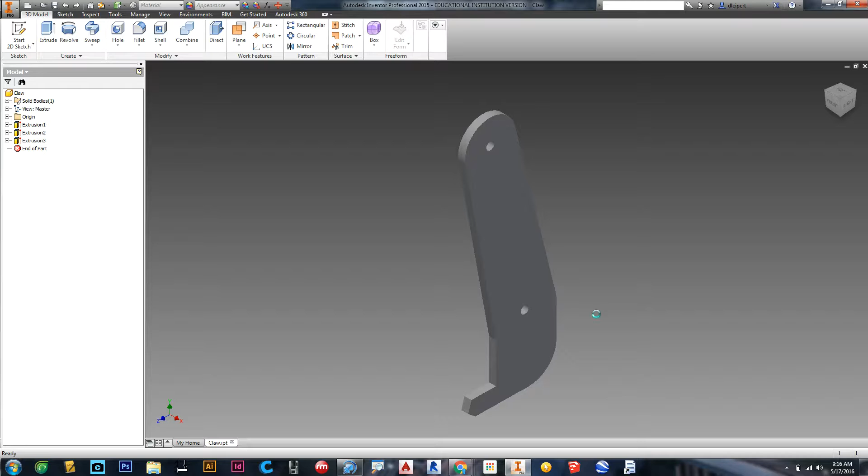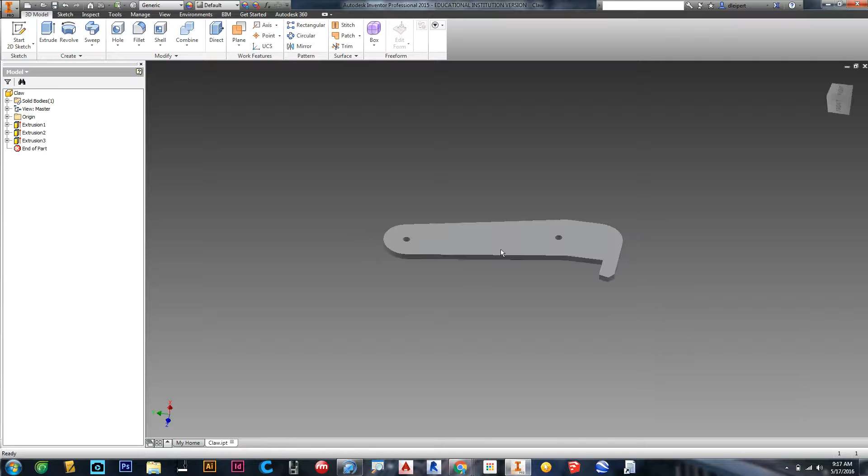As it opens, I'm just going to examine it real quick to make sure it's something that I can laser cut. What I'm looking for as I examine this part is that it's pretty much flat in nature, so that when I project one of its views into an IDW drawing, I'm pretty much capturing the whole shape with exception to its thickness. So right now, I know that if I take a look at this thing just like this, I can laser cut this geometry, and then whatever material I put in the laser cutter will automatically get me the thickness that I need. If this thing had another part maybe coming up that was perpendicular to the surface, it would be better for 3D printing and worse for laser engraving. So this part will work.

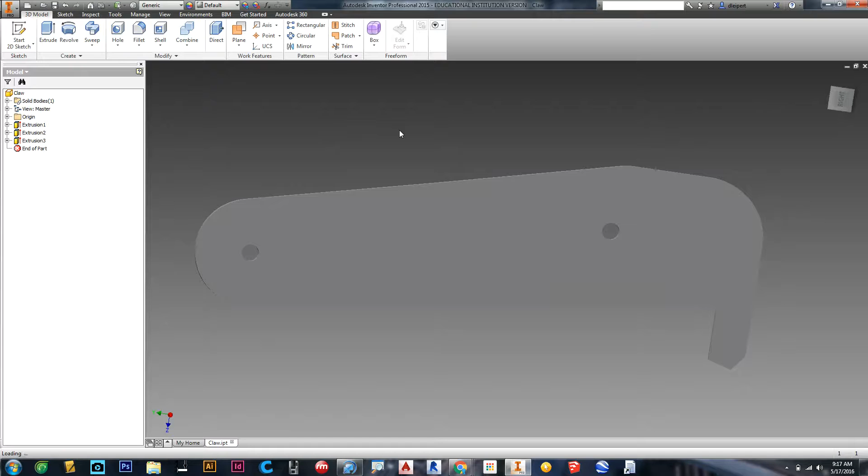So now that I've determined that, I'm going to just create a new Inventor file. I'm going to go to new, and I'm going to make it a drawing file because I need to have some 2D geometry. So I'm going to go new drawing. This is an IDW file.

As this opens, I don't need this title block, and I'm going to change the size of the sheet. So there's two things I'm going to do. The sheet size, I'm going to right click on it, and we're going to edit this sheet, and we're going to make it the size of our laser cutter. Our laser cutter is roughly 18 by 12 inches, 18 inches wide and 12 inches tall. That's the size of the bed of the laser cutter.

So we're just going to go to a custom size. We could go to the 12 by 18, but technically the laser cutter is like a thousandth of an inch short of that, and I've had problems with that in the past. So we'll do a custom size. Let's name it laser, and we'll make the height of this 11.8 to just be safe, and then we'll make the width 17.8. So it's just under our 12 by 18 bed size, and this should be fine.

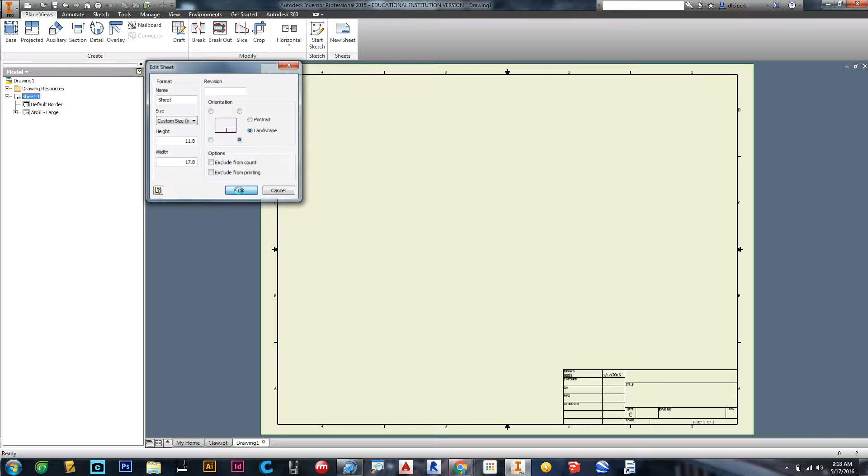We'll say okay, and now we see that our paper size has changed. This is actually the physical size of the laser cutter's bed as if we were looking down on it. If we wanted to place something on the laser cutter, typically we like to place it in the top left corner because that's where the zero point is on the laser cutter. Then this paper, we don't need this border, so I'm going to right click and delete the border. And then I don't need this ANSI title block, so I'm going to right click and delete that title block. Now basically what we're left with is a blank sheet of paper that represents the bed of our laser cutter.

From there, I'm going to project a base view onto here. So I'm going to click on base, and now it's like, all right, well, which file do you want?

We can browse and search for any file that we want. But right now it already knows that I want the claw because that was the last thing that was open. And then I need to pick a scale, very important.

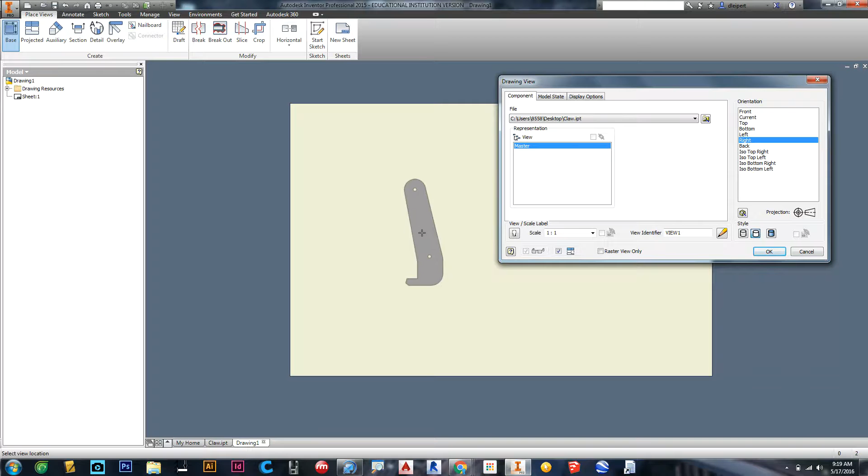If we plan on making our parts the actual size that we made them in Inventor, we want a scale of 1:1. If we want it to be smaller, we can change that, or larger. Then I can shift it around. There's my current view, top view, bottom view, left view I kind of like, or the right view I kind of like. So let's just say I choose left view, and I'm going to place my part. Then I'm going to right click and say okay. So I have my part placed.

The only thing that's wrong with it right now is that it's with black lines, and I don't really know their thickness, so I have to find out the line weight and the color now. How do I change that? There is a way we can click in. If we double click in, we can kind of find some display options here.

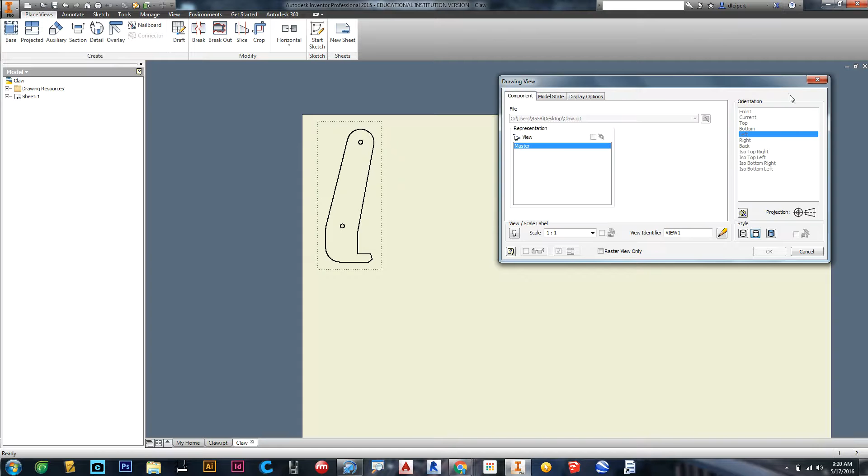It's not there. Let's try a highlight and then a right click. And we're looking for something called like a line detail. Line detail, so let's see, we're not seeing it here. We might have to go up and search, into the menus.

This is properties. So if we can get just the line itself without the box, if we have this border highlighted, it doesn't work as well. If we get just this line, and click on properties of the line, now I can find that line's individual properties. If I can highlight all the lines without getting that dashed box around the outside, that would be the fastest method here. So I've got that line now.

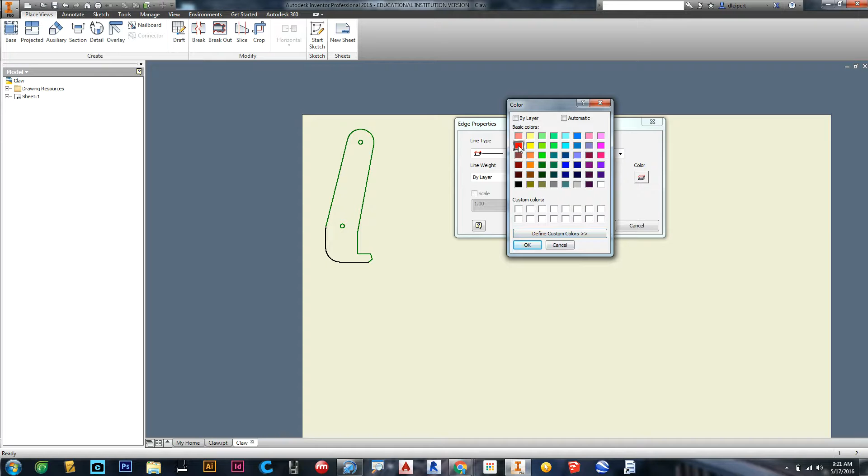Continuous is good, so By Layer is fine. Color, I'm going to pick a red, this red right here. Say okay, we don't want to get into custom colors, we want this default red color. It can't be light red, it can't be dark red, it has to be this red right here. Say okay.

The line weight, we have to adjust. We need it to be as small as possible, so 0.0001 or 0.001 is our line weight. Then we say okay, we click off. We can see everything changed except for this line here.

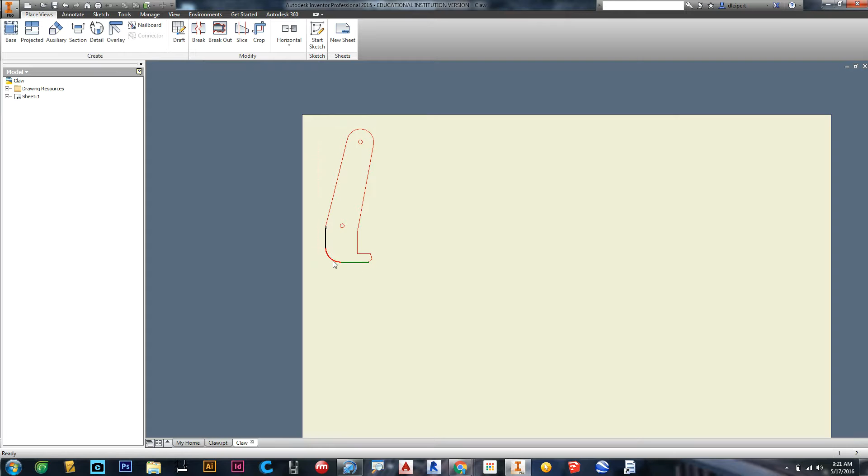So I need to get these lines. If I hold down Shift, Control, let's see if we get more than one. I hold down Shift, I can pick more than one line. Now the key here is I have to get every single line. I can't allow any lines not to be the correct color or line weight. Once I have those all selected by holding down Shift and clicking on them, I can right click, Properties, and then now we're going to change this to our red color.

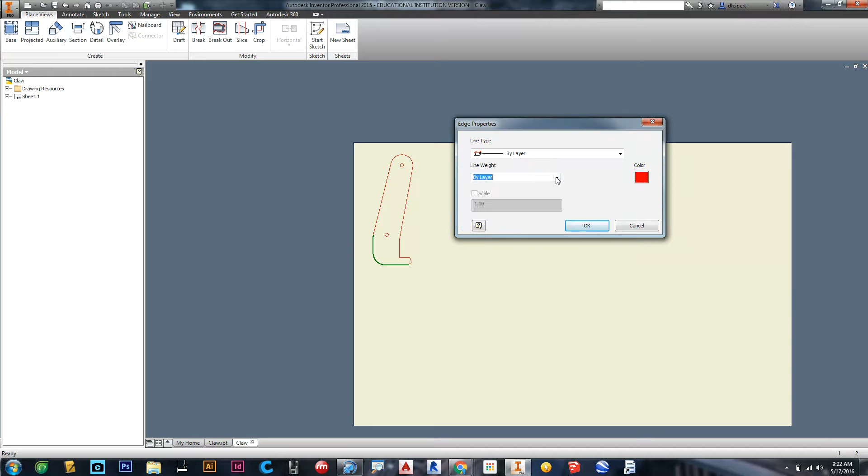And then we're going to change our line weight to 0.0001. Click off, everything looks pretty good now. Now that I have all that, since I know I'm going to be putting this in our laser cutter, I'm going to just try and bump this drawing up into the corner a little bit more so that way I'm not wasting materials. And click. Now it's up into the corner.

Now I can take a small piece of material and I can place it in the bed of my laser cutter. I'm going to save this, to the same place. I have everything else saved for this project, but for this demo, I'm just going to put it on my desktop. You would save it to your H drive with everything else. I'm just going to name it Claw Laser because we're going to cut out the laser cutter and say save.

But we're not actually done. We're going to export this as a PDF.

I should probably measure this to get an idea of what size piece we need to put in our laser cutter for this to fit on there. You should be able to eyeball it pretty well, but we can try and get a measurement on it.

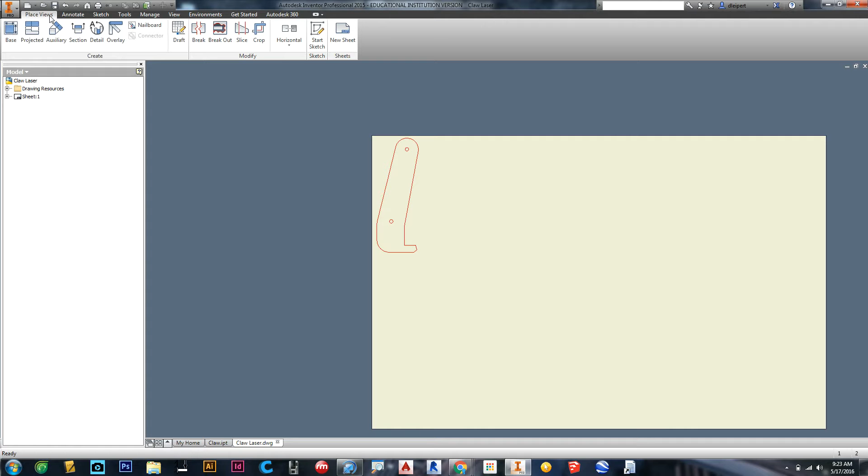I'm going to export this as a PDF file. So File, Export, PDF, and we're also going to name it the same way, Claw Laser, same location. Let's check our options to make sure everything's okay.

Just the current sheets, all colors as black, we don't want that. Remove object line weights, we don't want that. Vector resolution's fine, so this is good how this currently is. Nothing's checked, and we just have the current sheet. We say okay, and we say save.

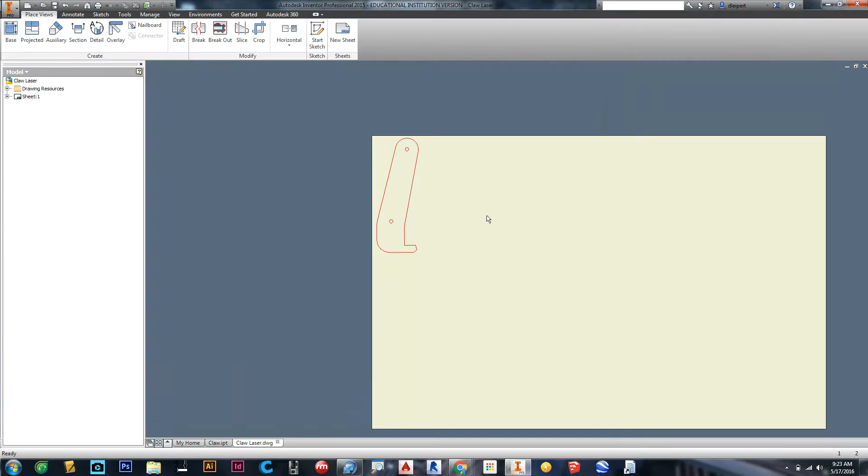This is the file we're actually going to send to our laser cutter. If you use the laptops labeled Rayjet, that has the software for the laser cutter. You need to email yourself this file, or even better, upload this PDF to your shared Google folder with your group. That way anybody in your group can download this PDF on the laptop that has the software, and then they can laser cut it.

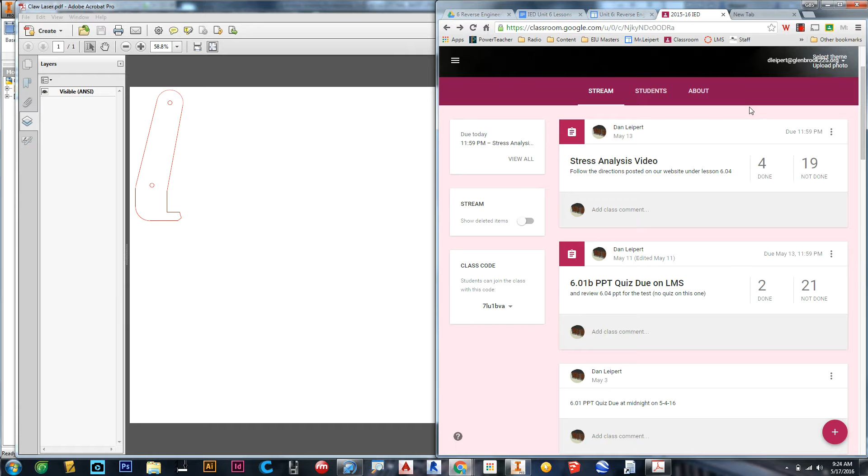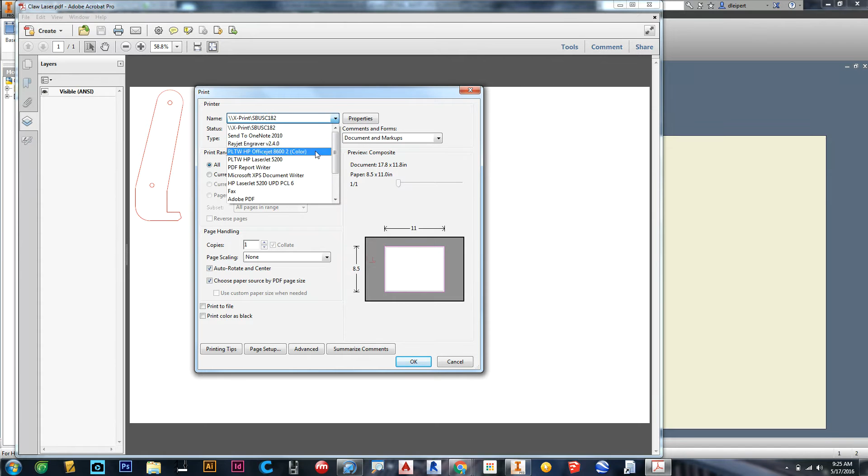The Rayjet here, you can see that it's 17.8 long and 11.8 this way, so this is definitely going to fit on there. We want to make sure that we have no page scaling, and so that's fitting just like this. All of these settings are correct.

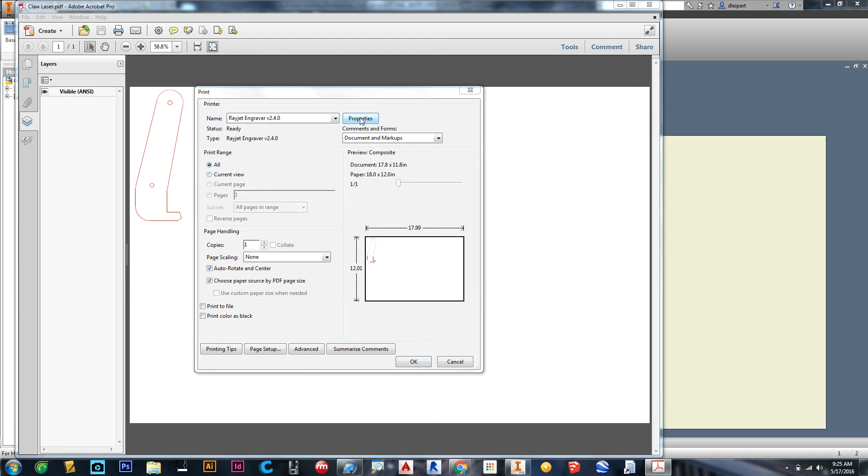If we want to check the properties of the Rayjet, we have to click on Properties. And on my website, if we go over on the left, I have laser cutting. We click on that, and you can get all the specs for the materials that we've discovered to be working pretty well. So for plexiglass, I recommend this cutting power, this speed, and this many passes.

So over in the Rayjet software properties, black is for engrave. If we click on red, that's for cut. This is how you adjust your passes based on what we see here. Our power settings, we can type in what we want, and then our speed, we can type in what we want. We want to make sure our material thickness is correct. So if plexiglass is 0.1 inches thick, I'd make sure this says 0.1 inches thick and autofocus is on. Once everything's the way I want it, I would then say next.

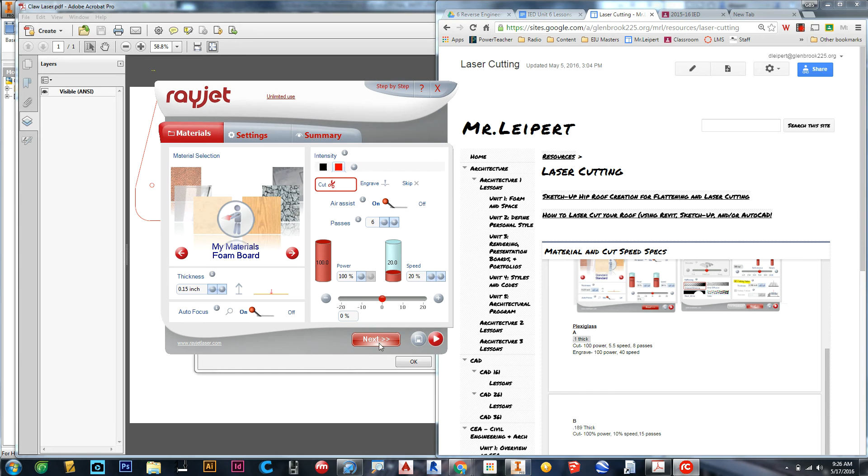And then I would make sure that this cutting table is checked. It needs to be checked. This thickness, don't change - it helps the laser focus automatically. Once all that's good, you can hit play, and then basically it sends it to our laser cutter.

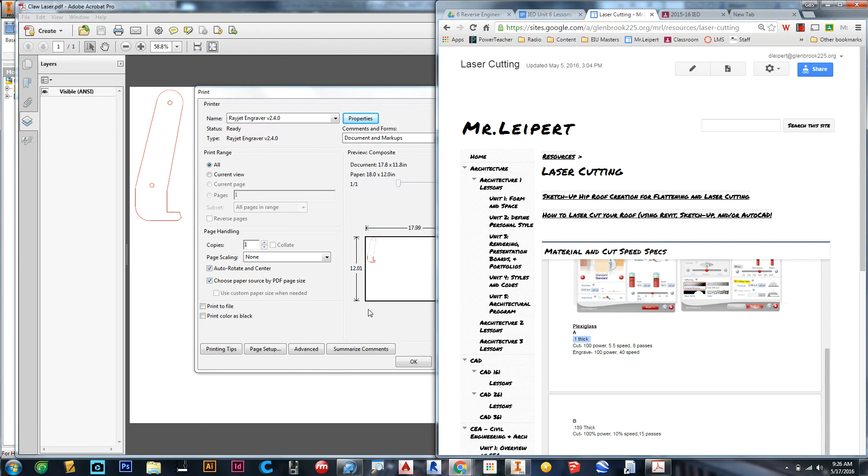Remember, you physically have to have the USB from the laser cutter plugged into the laptop for that to work, and you have to have the right laptop that has the Rayjet software installed - it's labeled on the cover of the laptop. Once all that's good, call me over and I'll make sure the vent's on, the laser cutter's on, and we'll be able to cut your piece.